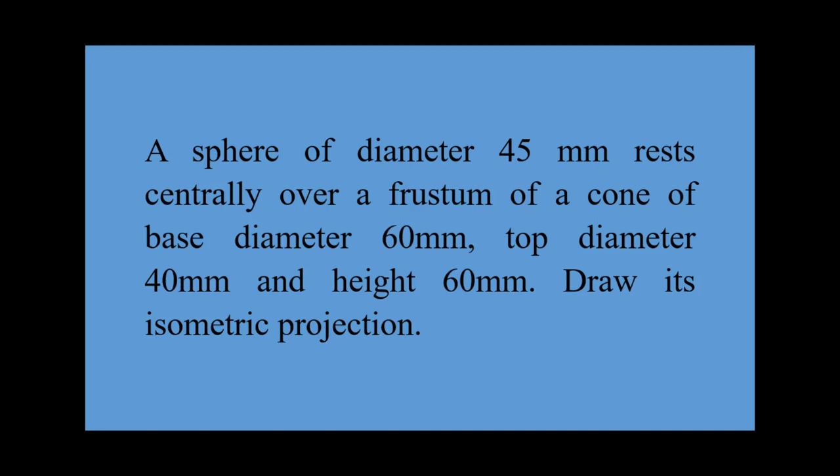Draw its isometric projection. To draw the isometric projection of the combination of solids, let us start with the frustum of a cone. This frustum of a cone has a base diameter 60 mm, top diameter 40 mm and height 60 mm. So base is 60 mm diameter, so you should draw a square base and enclose the ellipse inside the square base. So the square base is of 60 mm side,

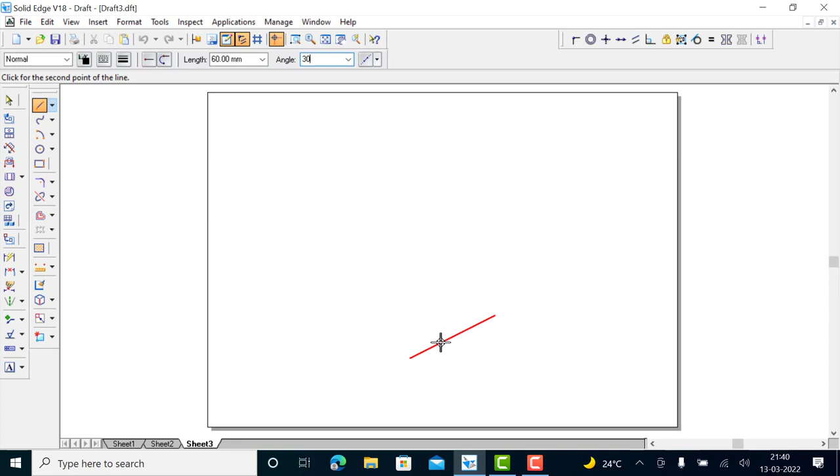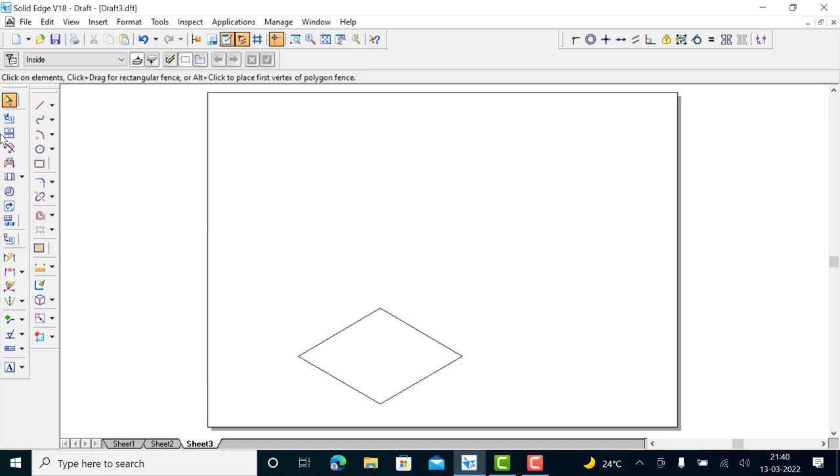so you draw 60 mm at an angle of 30 degrees, then again 60 mm at an angle of 150 degrees, then again 60 at an angle of 210 degrees, then you can close this base. So this will give the enclosing square base. Okay, so here you have to draw the ellipse using the 4 center method.

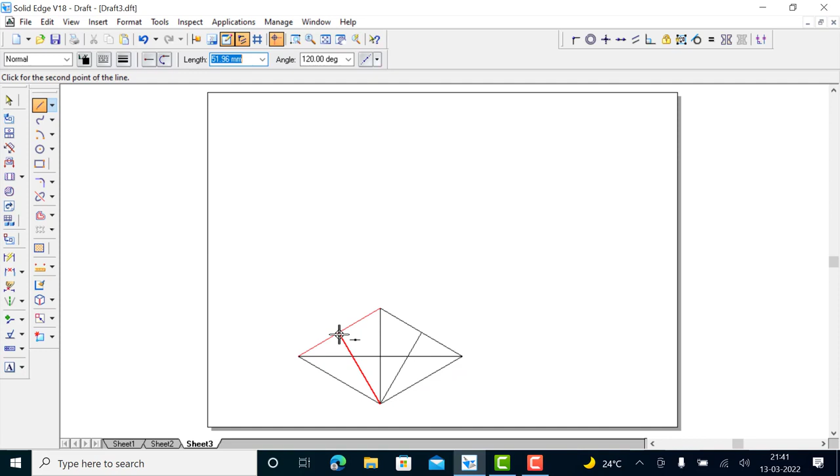So you draw both the diagonals, then from this end of the minor diagonal, you connect to the center of this side. Again from here connect to the center. Now you can use the arc by center point: this intersection you can select as center, this as radius, draw an arc to meet the midpoint.

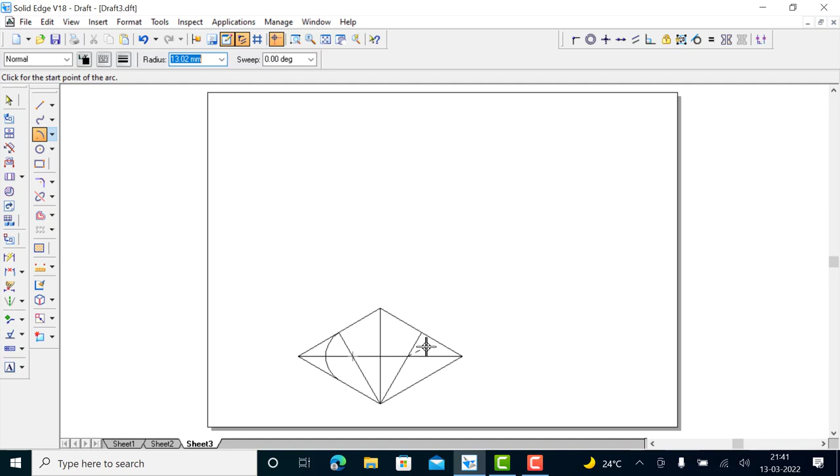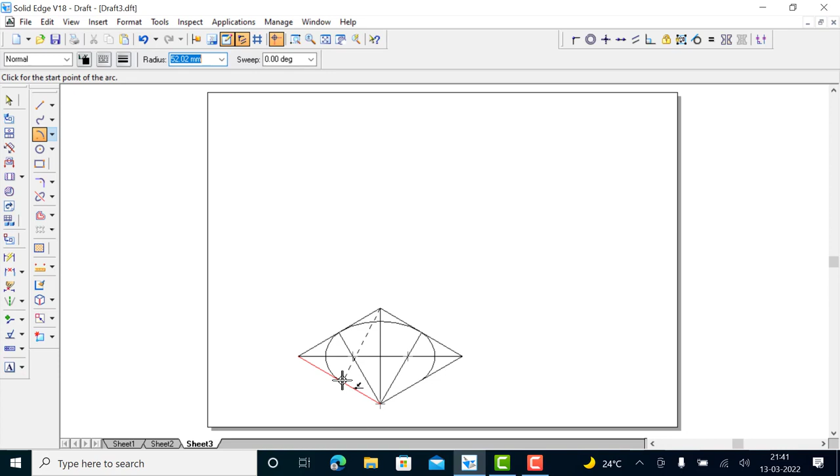So again from here, the intersection as a center, arc radius is equal to this, draw an arc till it meets the center. Now this point is center, radius is equal to this, draw an arc till it meets the center. So here this point is center, and radius you can take until it meets here. So you got the base, you can select it and just move it to the center.

Now you have to draw the top face. Top face you can copy this and scale down. Okay, so this is a square base of 60 mm side, so it is a 60 mm diameter base. Now top face is 40 mm diameter, so you have to scale down this, and height of the frustum of a cone is 60 mm, so you can copy this.

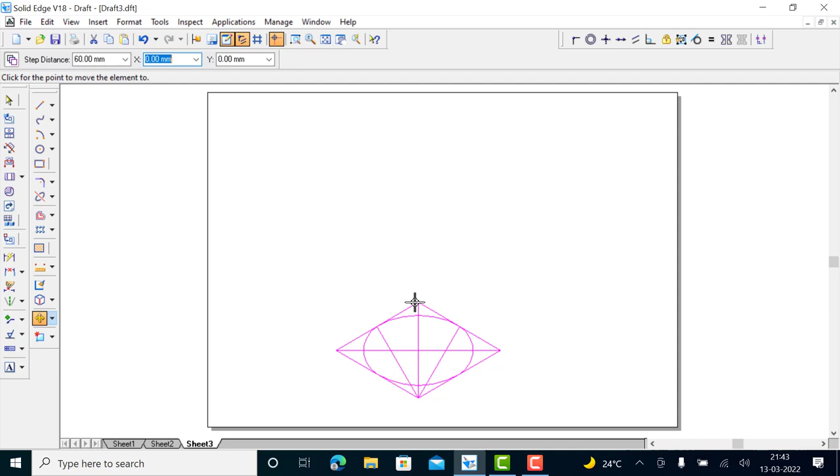You use the move command to move a copy of this. From the center of the base, you just move by a step distance. You can use the tab key to go to the step distance input field. There you give 60 mm and then press enter. So now you can move the mouse. When you move to the top, you will get a step there. When the mouse temporarily stops, click, and then you get a copy of this.

Now this you have to scale down. It's already selected. You can use a scale factor to scale down. You want to reduce from 60 side to 40 side, so scale factor should be 40 by 60. So you can directly type 40 divided by 60. That means from 60 you are reducing to 40. So you can press enter.

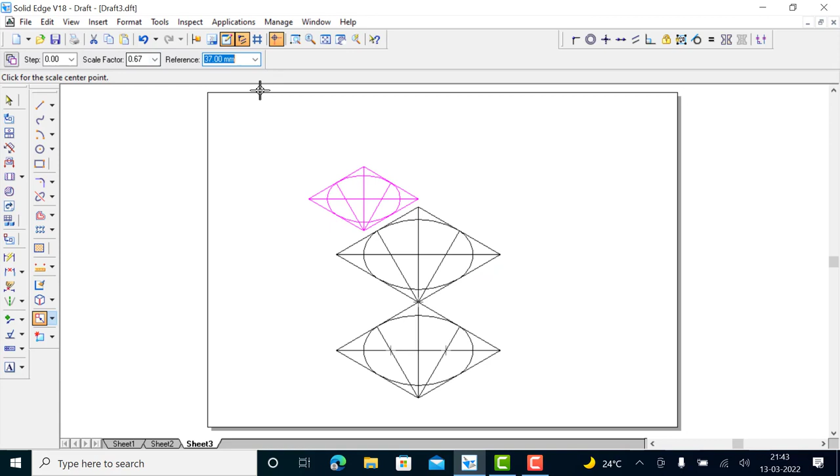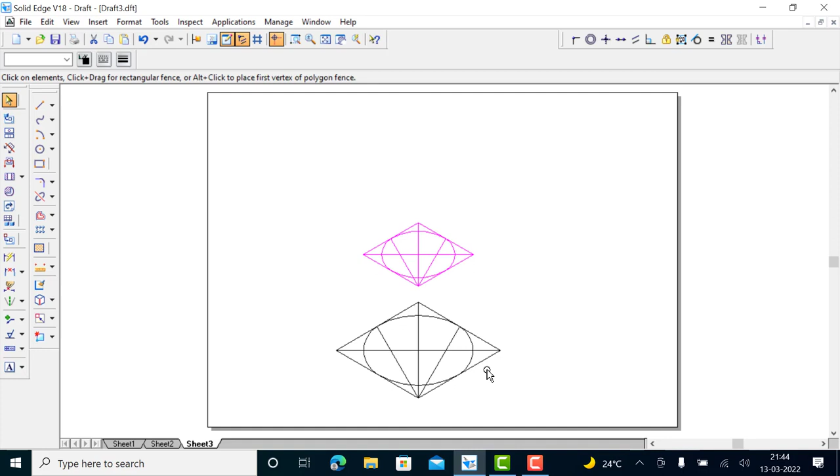And now which is the reference point? The center of the top face is the reference point. So you can select the center of the top face. Click now. So that has scaled down this ellipse. Now you can draw tangents to this, that will give the frustum of a cone.

Now I'll zoom this a little bit. Now I'll select this line tool, and when you get the point on element anywhere on this part of the curve, you can click and draw. As you move the mouse, this will move on the curve. Now when you get the tangent indication and point on element, you can stop there. So that will give the tangent to the ellipse.

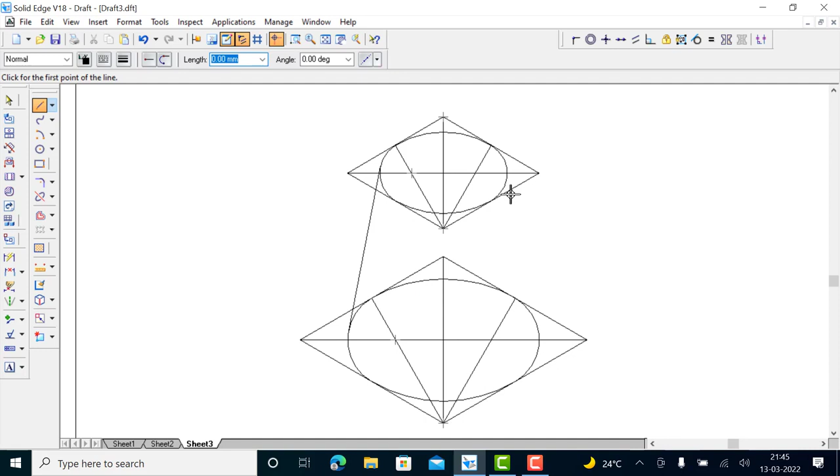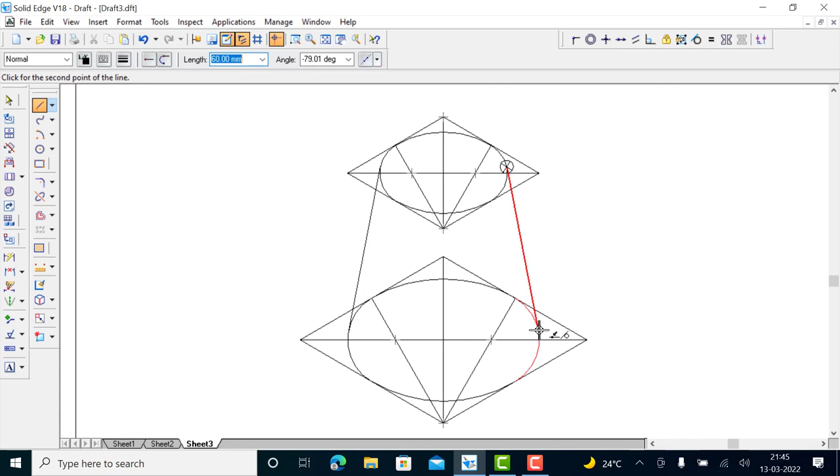So you are drawing tangent to these two ellipses. Now if you move here, you can see an alignment indicator. The same point you can click, with point on element and this alignment indicator also. So now you can click and just move down. When you get the tangent symbol and point on element, you can click. So that will give the tangent. So you got the frustum of a cone.

Now you have to fix the full sphere on top of this. So I'll use the fit command. Now the sphere center you should locate. From the center of the top face, you have to take the radius of the sphere. True radius I'll take, then later scale down. So the center is at a height of the radius. Radius is 22.5 because it's a 45 mm diameter sphere. So now you can locate the center of the sphere.

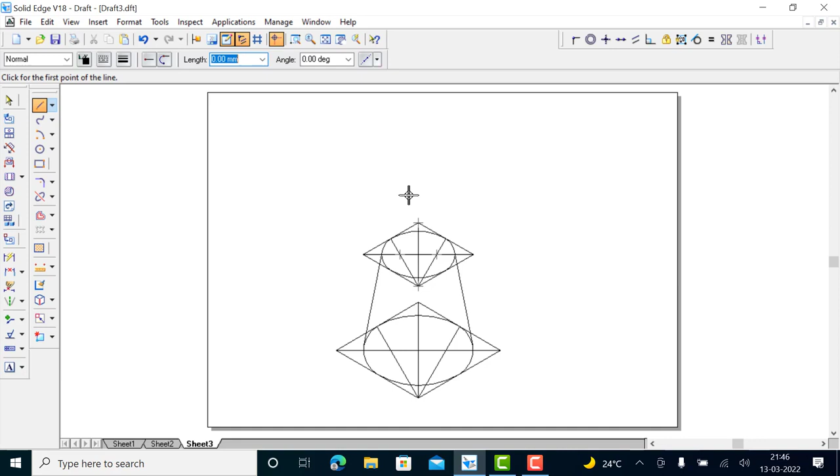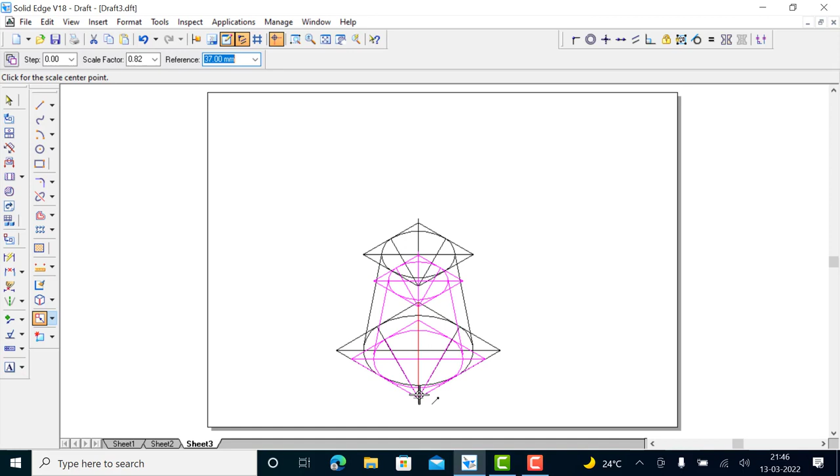Now before drawing the sphere with a true diameter, you have to scale down this. That is important, not after completing the drawing. Select this. Use the scale factor 0.816. That is the isometric scale. You can use a reference point like this. Now you scale down this.

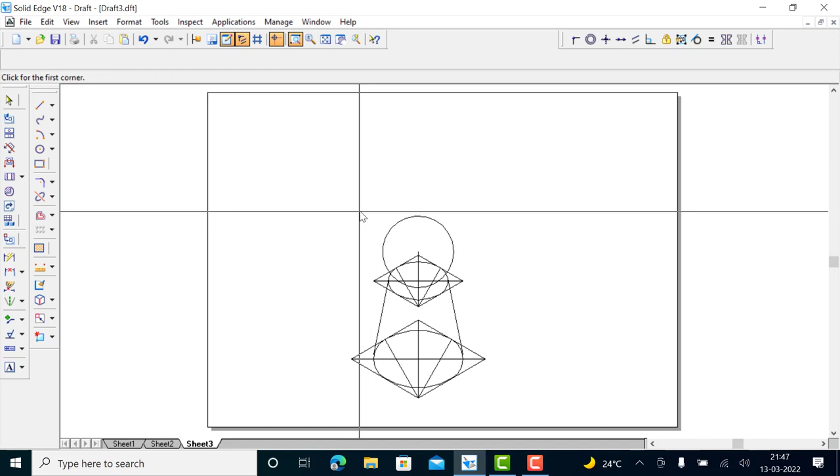Now you can use the circle command. You have the center of the sphere. So this is the center. Draw the circle of diameter 45 mm. So you have drawn this. I'll zoom this. Now the visible part you have to show.

So here the arc you have to split. Use the split command. Select this arc and split at the intersection. This part of arc you can select and split at the intersection. And then this part of arc you can select, and at the end of this line you can split this arc, and again at the end of this line you can split.

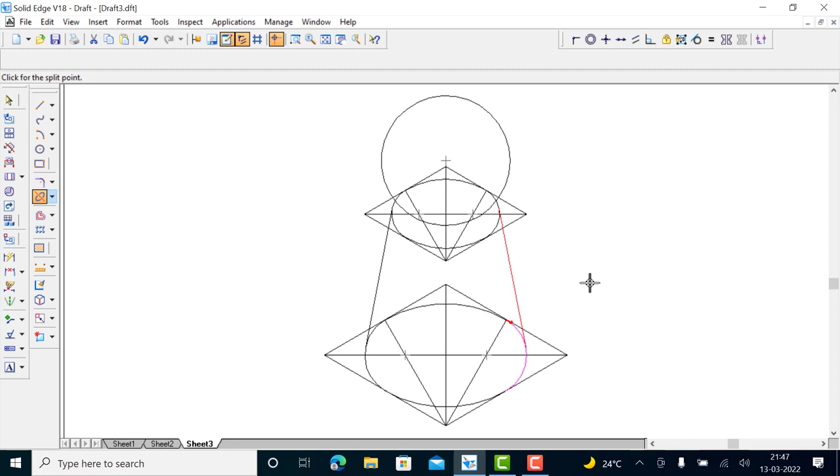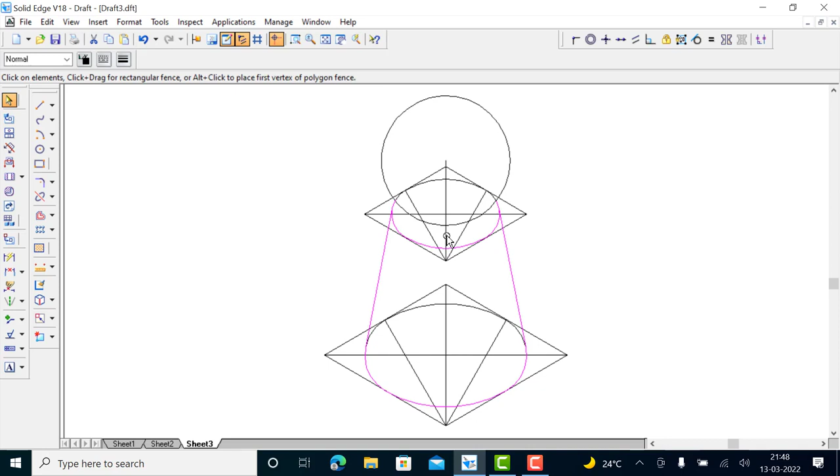Now you can show the visible part of the solid. These tangent lines are visible. This arc is visible. This part of arc is visible. This part of arc is visible. Sphere is completely visible. So you can use the visible line. So that completes the isometric projection.